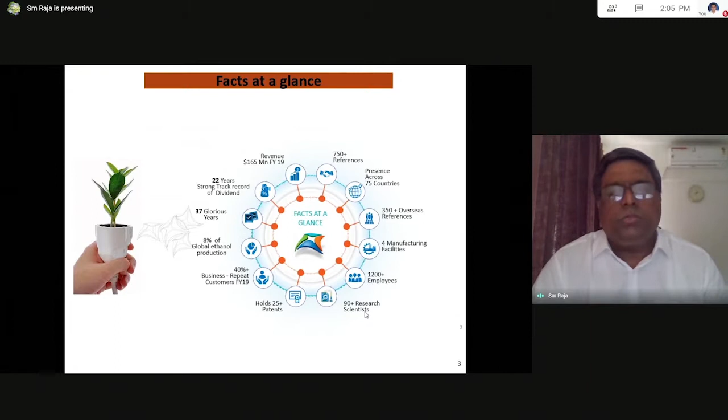So predominantly, Praj Industries is into bioenergy. Basically, we are the leaders in distilleries and breweries. And most of the distilleries and breweries in the country, like more than 70-75%, have been set up by Praj Industries. And we have 5 verticals, the main being bioenergy, which is categorized as 1G, that is bioethanol. And the other one is 2G, which is called the ethanol for blending with oil, that is basically your diesel or petrol, which is gaining more and more importance now with fossil fuel being exhausted.

The other division we have is high purity, where we produce very high purity water, especially for the pharma and cosmetic industries, where they require very sterile water for their formulations. And we also have a very big fabrication unit, wherein we do fabrication of very large equipments, and we supply it to many of these contractors like L&T and other big companies who are into engineering projects.

And one of the main verticals where I am associated is water and wastewater, where we give complete water treatment as well as wastewater treatment solutions as a turnkey contractor. We design, engineer, supply, erect and also commission the plant. We also do operation and maintenance of these plants. And we are one of the very few companies in India who can offer complete end-to-end solutions in water

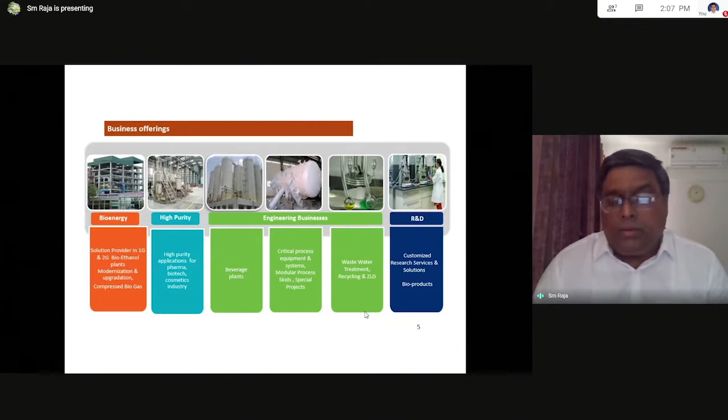We also have a very big basic R&D, which is called Matrix. It's a 100 crore investment. We do a lot of research. We have almost 100 scientists, all of them PhDs, and also a lot of postgraduates who are working on many of the solutions that we offer to our customers.

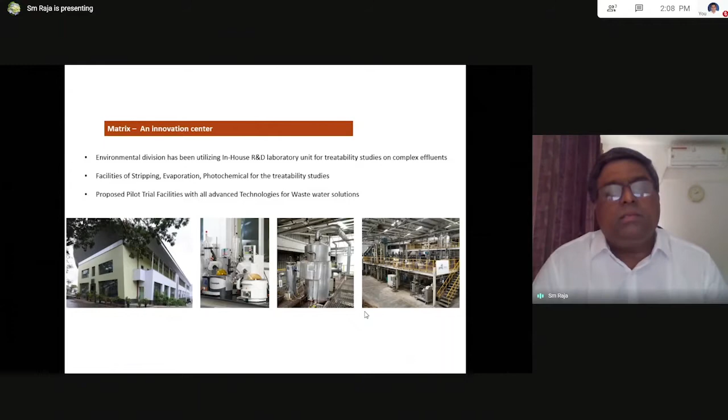And it includes the development of new products which are more environment friendly, and green chemicals. And we also have a facility where we can do piloting of the products that we are researching and giving to the chemical industries predominantly. So we have a very large facility where we do all the piloting, and then it is scaled up to field scale units.

Out of the fresh water, 69% resides in the glaciers as ice, 30% as underground, and less than 1% in lakes and rivers, which is the main source of water for all of us, not only human beings, but even the other living beings. So 1% of water on Earth's surface is usable by all the living beings on Earth, including 7.8 billion human beings as of today. It's going to increase more. And 99% of this is unusable.

So we can understand it's not an infinite source, it's a finite source. And therefore, for future sustenance, it is imminent that we need to reduce the consumption of water as much as possible. We need to conserve it. Not only that, we have to also reduce, recycle, and reuse as much water as possible.

The main uses of water available for human beings can basically be categorized as domestic and industrial use. In domestic use, most of the usage is for drinking, cooking, washing, gardening, and bathroom washing. Whereas in industrial use, you have boiler feed water, then you have demineralized water. And as I told you earlier, high purity, that is your pharma and food.

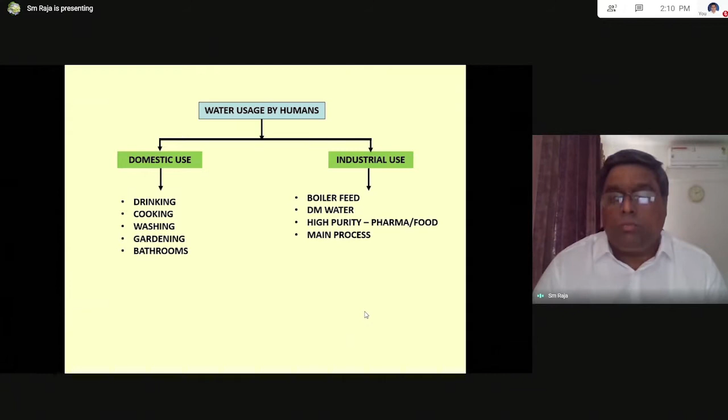It may seem very simple, but water is one of the trickiest chemistries. So there lies your chemistry in this. Water chemistry is very intriguing. It's very difficult to understand, though it looks very simple. So you have the main source of water, that is the source of drinking water, which are the streams, the lakes, rivers, and aquifers, which is your groundwater.

And then we are looking more and more to the oceans because the freshwater source is limited. So now we have more and more people putting up desalination plants where seawater is converted to drinking water. This is more predominant in the Middle East, where there is absolutely no source of fresh water. They have to depend on seawater, and the seawater is converted into drinking water.

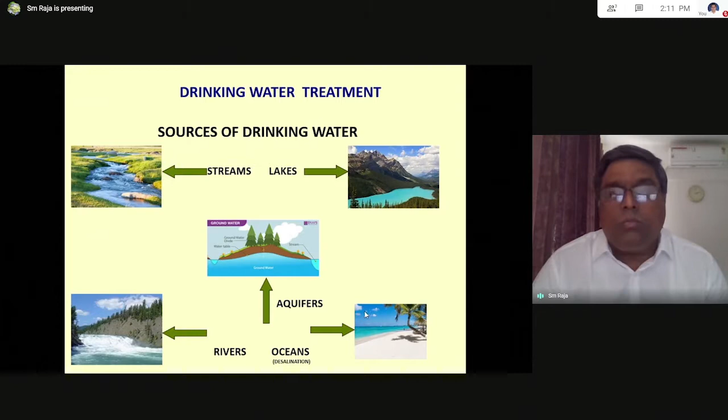Let's look at some of the natural contaminants in the drinking water sources that we have. If you look at surface water, that is the rivers and lakes, predominantly it contains suspended solids and colloidal matter. So most of the time you find that these resources are highly turbid, and you can see a lot of suspensions in this water. It also contains a lot of dissolved iron, because iron is one of the most common elements on the Earth's crust. And besides, some of the sources also have color and some sort of a mild taste.

And there are also sources with runoff, which is called agricultural runoff, like pesticides and other things, which also contaminate the surface water that is available. And of course, pathogens like bacteria, virus, and to a certain extent algae, depending on what the source is and where the source lies. As far as groundwater is concerned, predominantly it is all dissolved. You have very little suspended solids, because by the time it reaches the bottom of the aquifer, it is already filtered through the layers of sand and rocks.

And then by the time it comes down, the suspended solids are filtered naturally. However, it picks up a lot of the elements that are there, like the fluorides, arsenic, nitrates, iron, and a lot of dissolved salts. But if you see most of the cases, it is hardness. It is calcium and magnesium which causes hardness of the water.

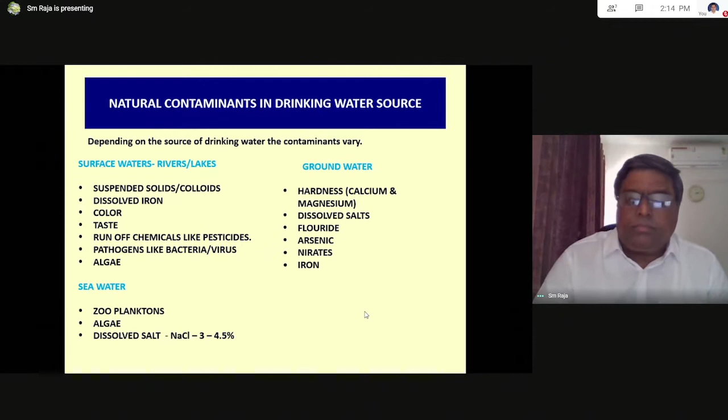The pH should be in the range of 6.5 to 8.5. And the taste also should be agreeable, in the sense that sometimes the water tastes very bad and we are not able to drink the water. The turbidity has to be less than 1 NTU, that is nephelometric unit. And dissolved solids, though what is desired is less than 200, which is normally what we call the soft water or sweet water, up to 500 you can still make it drinkable. The maximum limit is around 2000 milligrams per liter. So these are all milligrams per liter.

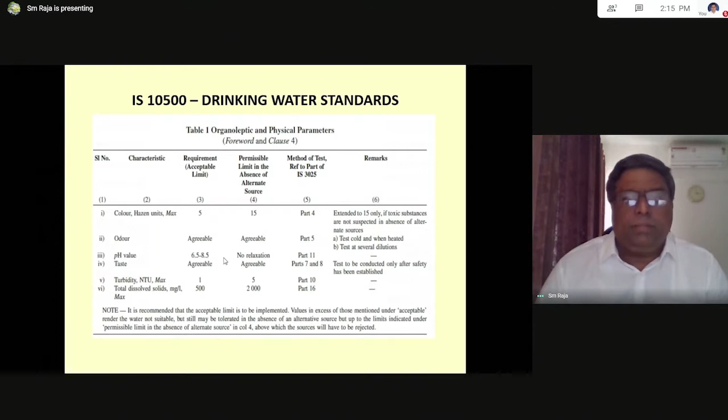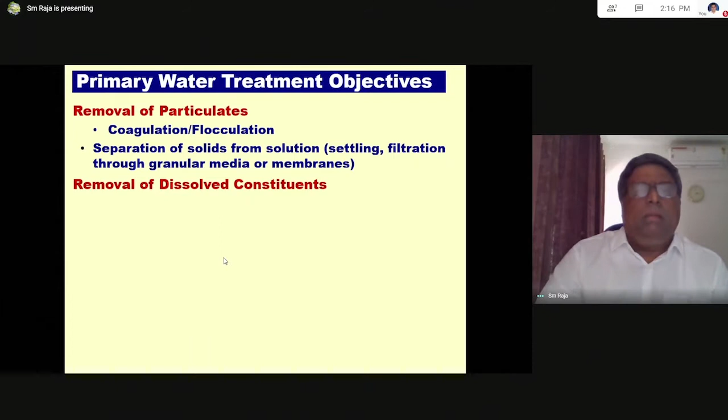So what are the primary objectives of water treatment for drinking? First and foremost thing that we need to attack is the particulate matter, which is the colloidal or the muddy constituent of the water. And to remove these particulates, we use a lot of chemistry for actually settling this matter. So if you naturally keep the water for some time in a container, the suspended solids gradually settle down. Then you get a fairly clear water at the top, which can be decanted and used for drinking. Still, it will have colloidal matter, which is not desirable to consume.

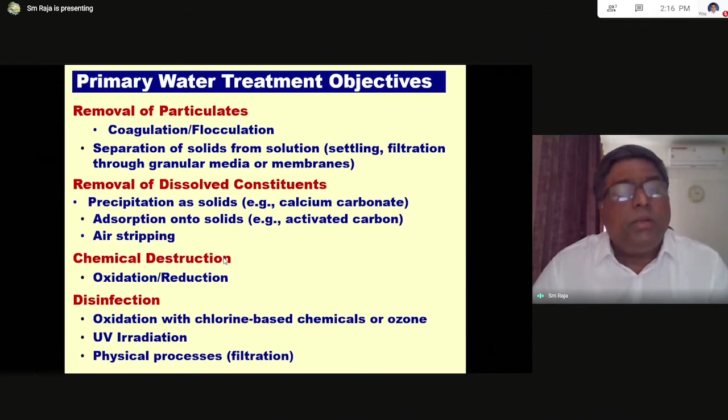Hence, there are different steps in the water treatment plant where you actually target different constituents, which I had mentioned earlier. So the first one, as I told you, is removal of particulates, where you add coagulants. Essentially, it is iron or aluminium-based coagulants. These are alum or ferric chloride. And these coagulants basically break the charges. All the colloids are normally negatively charged. When you add these metal coagulants, which are positively charged, they neutralize the charge on the colloids.

They don't otherwise settle because the density is very low. Coagulation helps in discharging these charges on the colloid matter, and they come together. Now, when they come together, they start forming larger particles and the density increases slowly. To aid this density increase, we add something called a flocculant.

So generally for drinking water, these are high purity flocculants, and because these are synthetic chemicals it is not desirable, but still sometimes flocculants are added. It's called a polyelectrolyte, and it increases the weight or the density of these particles and it settles very fast. So you have the first step of solid separation from the water, and that is your settling tanks.

And further, the colloidal matter which doesn't settle goes through a filtration unit, which we call a rapid gravity filter or sand filter. Essentially, sand is the media. And then it can also be taken through membranes. The latest technologies are when you provide these ultrafiltration membranes, where it can take off almost 99.9% of the colloidal matter. And what comes out, the permeate, is absolutely clear. And you can drink the water directly, of course, after disinfection.

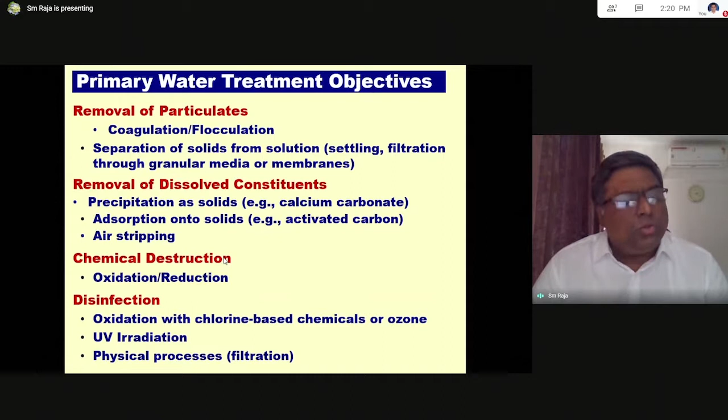And finally, the pathogens, that is bacteria and virus, which are also very important to remove. You need to disinfect it, and for disinfection, we use predominantly chlorination, because chlorine has a very long life as they form chloramines, and the presence of chloramines actually prevents reintroduction of the bacteria into the water. Most of the water after treatment is stored in large tanks or reservoirs, from where it is distributed to the population or the end use. Hence, it has to be ensured that there is no recontamination of bacteria, and that's why chlorine is predominantly used. However, we can still use UV radiation and also ozonation as the disinfection agent.

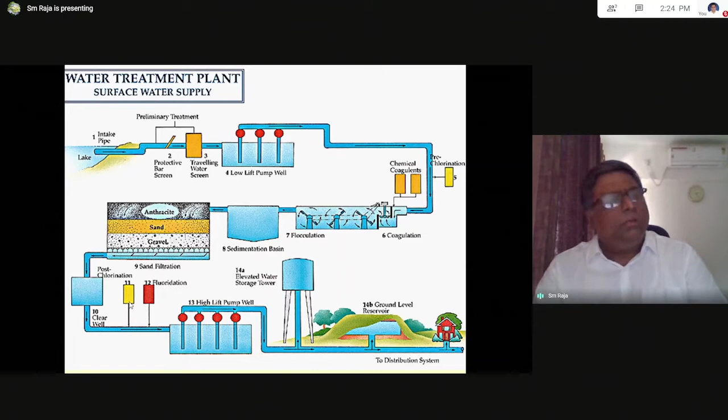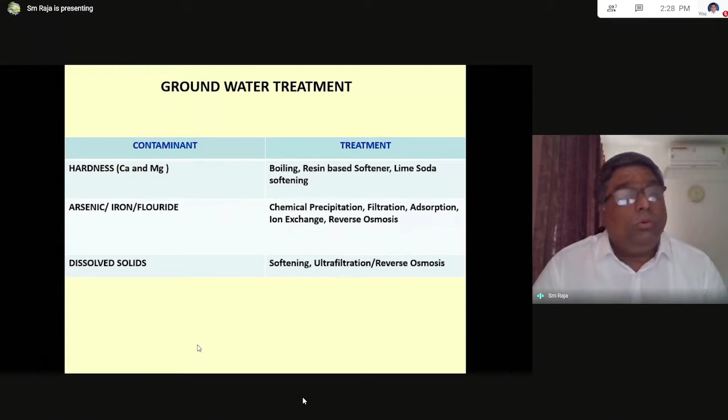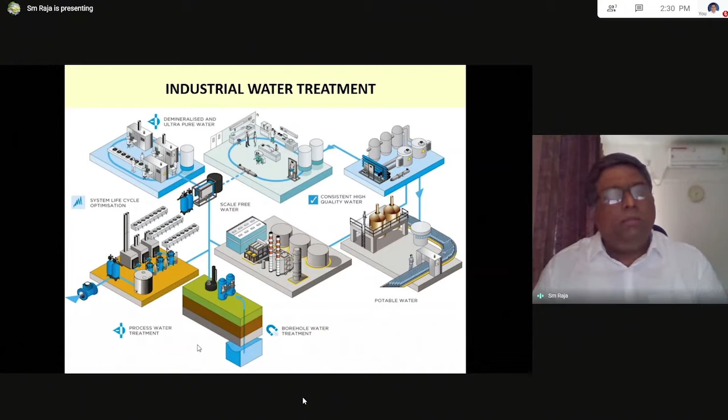So water treatment per se, depending on the end use, can be either a simple treatment like we do for drinking water application, or very complicated basically for industrial use. So the cost of water treatment is dependent on the final quality that you require of the treated water.

Now, more and more, as urbanization is increasing and the populations in cities are increasing, there is very little water available, and all these cities which are near the sea are looking at seawater as the main source of drinking water. This is predominantly true in most Middle East countries where there is absolutely no source of surface water available. And even if you've gone through the news a couple of weeks back, even in the USA, in California, they are water starved, and water has become a commodity for trading. So you can understand the future we are going into if you don't have a source of water.

Seawater is extremely expensive to treat because it has to go through all the sophisticated technologies like UF and RO, and at the end of it there is a byproduct which is highly concentrated and full of salt. How do you dispose the salt? That itself is a big problem, a big challenge. So things are not that easy. At the same time, if we are able to recycle and reuse most of the water, that is going to be our solution.

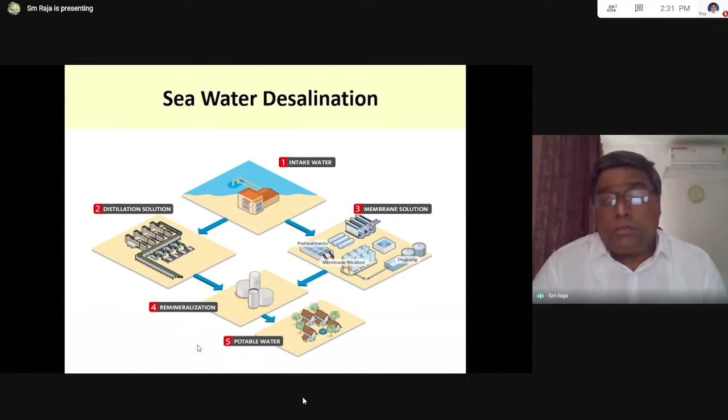As the water consumption reduces, it means all these countries are getting less and less water, either because the source is limited, or their water treatment facilities are limited, or they are in a water starved and water stressed area. India is one of the water stressed areas, and it has been said that in future India is going to go through a very difficult time satisfying the water needs of the majority of its population. So it is very important for us to understand how water has to be conserved and used as little as possible, so that we conserve this water for our future generations.

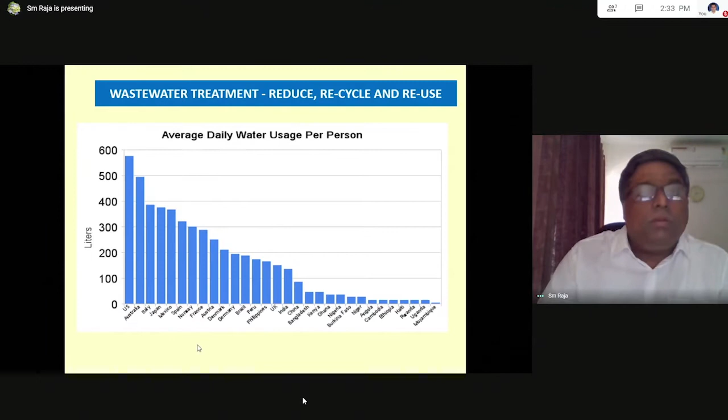So I will now come into wastewater treatment, which is very important. I think it's the most important subject for all of us to understand, because we are all equally responsible for the amount of waste generated in the country and all over the world. 80% of the drinking water we consume is converted to wastewater, and it predominantly comes from our bathrooms and toilets. The source in domestic wastewater is kitchen, washrooms, wash basins, and laundry.

So imagine you take 100 liters of water, only 20% is used for your normal consumption and cooking, and 80% is the wastewater that you generate. So if you calculate per capita generation, you can imagine what will be the amount of wastewater that is generated. It runs into millions and millions.

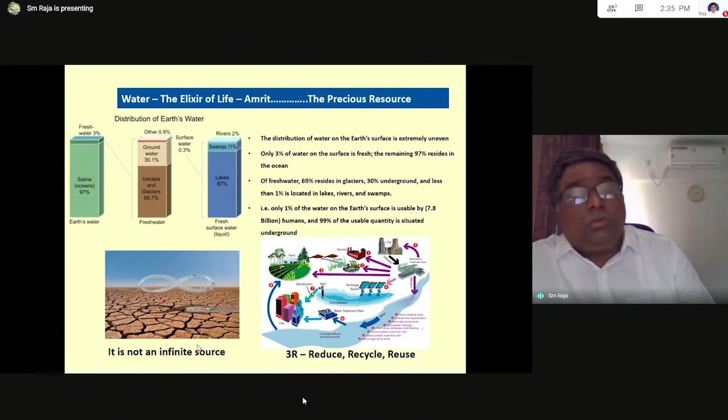So I would again come back to the first slide I showed you about the state of water, the availability of water, where I said it's not an infinite source, it is a finite source. And we need to really be very serious in conserving water at source and minimizing the wastewater. Even though you cannot eliminate wastewater, it is going to be there. But how do you manage the wastewater? It is best that we follow the principle of 3R, that is reduce, recycle, and reuse. There is no other option left.

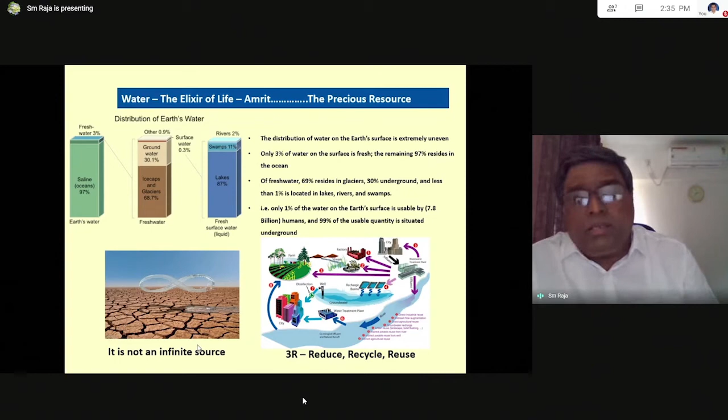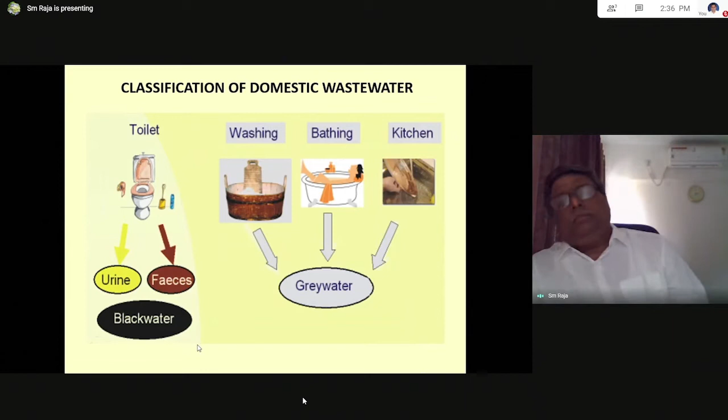And so we come to the topic of how to treat this wastewater, the domestic wastewater. I'm not going to touch on the industrial wastewater because it's a very vast subject, and the more the usage, the more complicated the wastewater becomes in terms of its components and constituents.

So if you classify domestic wastewater in terms of generation, there are two main classifications. One is called black water and the other is gray water. Black water is the urine and feces generated through usage of the toilets, whereas gray water is predominantly from washing, laundry, bathing and kitchen. You can segregate these two and recycle separately, or mix them together and treat as a single domestic wastewater. It all depends on the place and ultimately the treated water quality required for where you're going to use the treated wastewater.

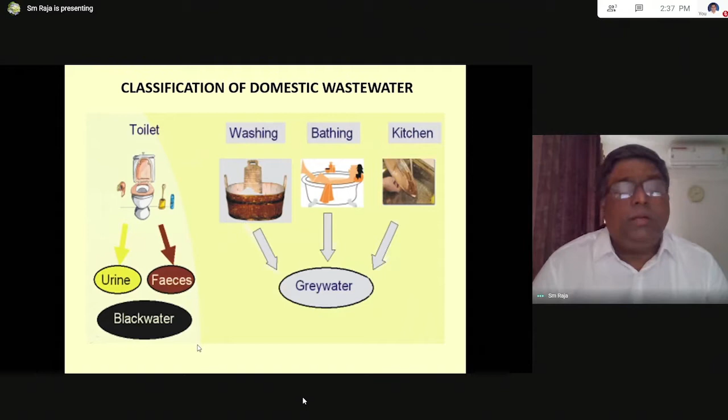Now, the typical composition of sewage, domestic wastewater: the contaminants are predominantly suspended solids, which we have seen is also part of drinking water treatment, but this suspended solids is different from what you've seen in drinking water. You also have dissolved organics, classified or termed as BOD and COD. BOD is biological oxygen demand, and COD is chemical oxygen demand. Both are essentially the same, only differing depending on the analysis and the constituent segregated.

So it's very difficult to individually know what the contaminant is, like I cannot keep analyzing each and every component in the wastewater. So best is you take a parameter that defines the amount of contaminant, the scale of contaminants. That's how the biological oxygen demand, or BOD, concept came about, where we know that when this water is left without treatment into any water body, either lakes or rivers, there is a biological oxygen demand needed to naturally degrade these organics. So that is called the biological oxygen demand, and there is an analysis which gives you how much the BOD is.

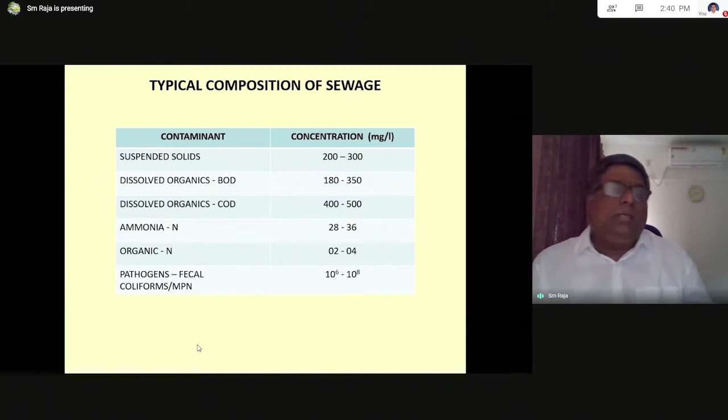And then we have ammonia, which is all your amino acids, your proteins, what you eat, your digestion. Byproducts of your digestion are predominantly nitrogen and phosphorus. So your sewage will contain ammonia nitrogen, organic nitrogen, and also phosphorus. And then the most important is your pathogens, your fecal coliforms, what we call the MPN. So these are all indicators of the level of contaminants in a domestic wastewater.

In a sewage treatment plant, depending on the constituents that you need to separate or treat, there is a flow sheet that has been developed, which is a very conventional flow sheet. Most of the sewage generated from households is collected through drain pipes. Earlier there used to be septic tanks, but septic tanks have also become a problem because the overflow from the septic tank ultimately goes into your groundwater and contaminates it.

So in large cities and municipal corporations, you have a sewerage connection system where the sewage from all these households is collected and conveyed through pipelines to centralized sewage treatment plant units, where all the contaminants of the sewage are treated stage-wise. The conveyance may be through a pipeline or an open drain, which is normally not there. Nowadays, open drains are not permitted. It is generally through underground pipes.

It contains a lot of floating matter because people just push everything into the toilet. And when it comes to the end of the pipe, where it enters the sewage treatment plant, you will find all sorts of things that are irresponsibly put by people into the toilets. They just flush it through the toilet. So it contains a lot of floating matter which needs to be removed.

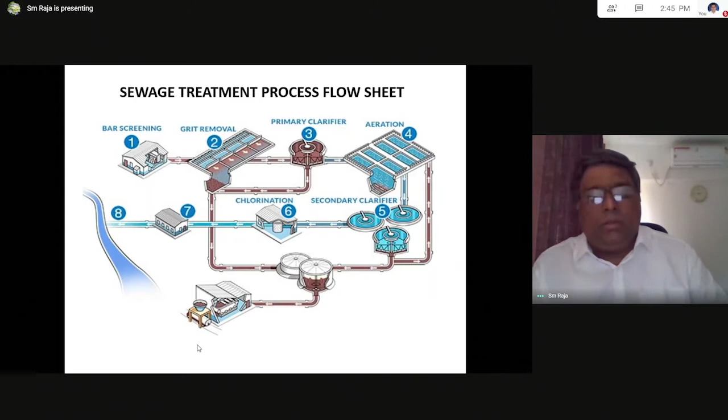But if you don't remove the nutrients, the nitrogen and phosphorus, it is going to cause eutrophication of all the water bodies where this treated sewage is ultimately going. So the fundamental principle is that after treatment in a sewage treatment plant, all this treated water will get diluted further in the receiving water body, like a river or a lake or any other water body where there is some source of fresh water also coming in.

So as I told you, I'll just run through the flow sheet. This is pre-treatment, and you can see there is a screen, a mechanical screen, which continuously removes the floating matter from the sewage, and the floating matter is separated from the water. And then it comes into a grit chamber. So the grit chamber is basically, again, a sedimentation tank. And in the sedimentation tank, the grit is removed at the bottom.

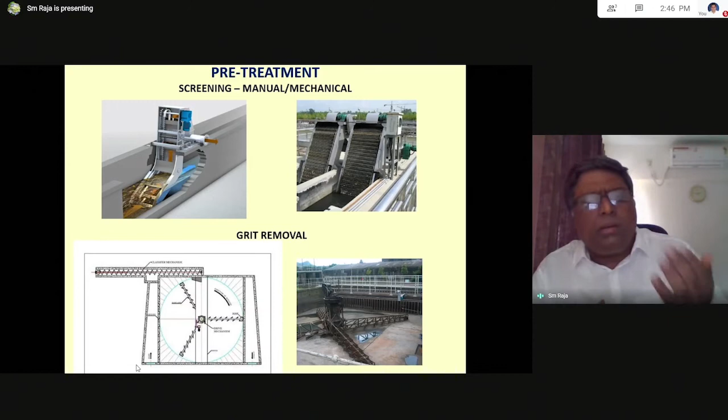There is a scraper. The grit is scraped at the bottom and taken to a central point, from where it is again separated from the organic material, because the sand also contains a lot of organic material. So you have a rake classifier which separates the actual sand from the organic matter. The organic matter is returned back into the sewage treatment plant.

And after the separation of grit and screenings, it goes into primary treatment, the primary clarifier. It's essentially, again, a civil tank, an RCC tank that is constructed in a circular configuration. It could be a rectangular configuration, but circular is easier because you have what we call the rake mechanism. It's mechanical equipment with a motor and a gearbox, and it rotates at the bottom very slowly, because whatever settled sludge is there has to be taken into a central well, from where there is a pipe for discharge of the sludge.

So this sludge from a primary clarifier is very rich in organic matter. It is full of calories. So it goes to a sludge digester where it is anaerobically digested downstream, and you can generate biogas from the sludge in the anaerobic digester.

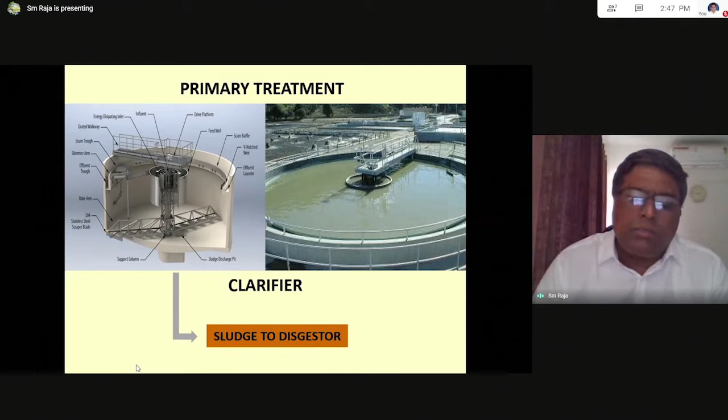So once your suspended solids are predominantly taken out of the water, the next step is to remove the organics, that is the BOD and COD. And as I told you, there's a typical aeration tank. These are again all RCC tanks, which contain the domestic wastewater. And you have the aeration system where you have a blower along with fine bubble diffusers. The fine bubble diffusers are given because you need efficiency of the blower to reduce the power consumption.

And just to give an idea, in any sewage treatment plant, the maximum cost of treatment goes to oxygenation, that is the air blower. You have to have massive air blowers to supply the amount of air that is required for the bacteria to oxidize the BOD and COD organic materials and reduce the BOD and COD in the treated water outlet. And hence almost 60% of the energy used in the sewage treatment plant goes only to providing air for the aeration system.

So once the microorganisms in the aeration tank perform the duty of removing the dissolved organics, it is taken further into a settling tank where the sludge is settled and the clear water comes out of the clarifier. It is more or less very clear except for some particulate matter again. And if you compare drinking water and wastewater treatment, the settling tank units remain almost the same, and the downstream filters also remain the same. But here we are actually separating the biomass, not the inorganic particulate matter, unlike in the drinking water system.

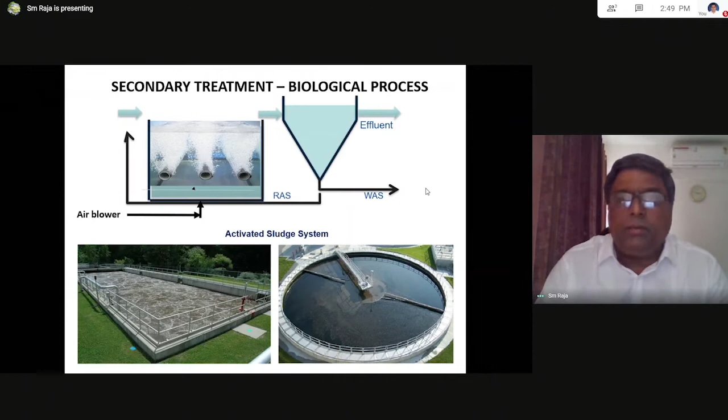But what happens in that due course is it goes through a series of biochemical reactions, and finally you have methane as the gas, the biogas, which is predominantly methane, carbon dioxide, and H2S to a certain degree. But essentially it is all methane, which can be used. So the effluent gas is collected at the top because the gas will go up, and the gas can be taken into a gas holder from where it can be reused: either you can use it for cooking, or the gas can be used to generate electricity through a dual fuel engine.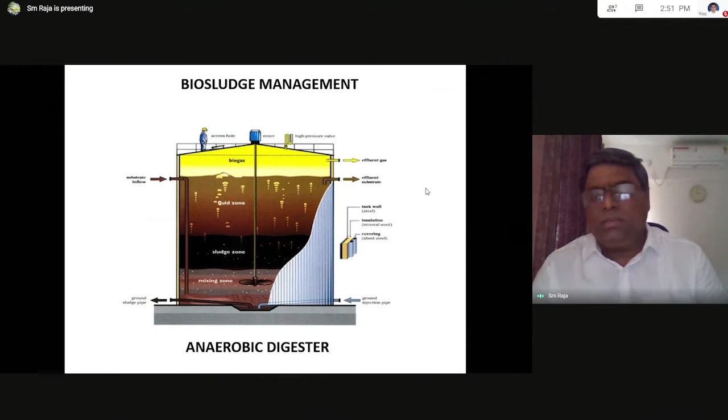So a lot of plants today are going in for biogas recovery from the waste, because ultimately every wastewater treatment is full of energy. It is full of energy, and there is a lot of organics present in the wastewater. And what happens to the digested sludge? The digested sludge is further dewatered. All the water component is removed, and you see to it that you have maximum solids into it so that the volume of the waste reduces. So there's a cost attached to transportation of the sludge also.

Then it is given hydrothermal treatment, wherein you can convert the sludge, the biosludge, into solid fuel, which can be used back in industries like biorefinery. It can go into a lot of other uses like electricity generation or source of heat. And also it can be used as natural fertilizer. A lot of this digested sludge is taken by local farmers and used as a fertilizer for their fields.

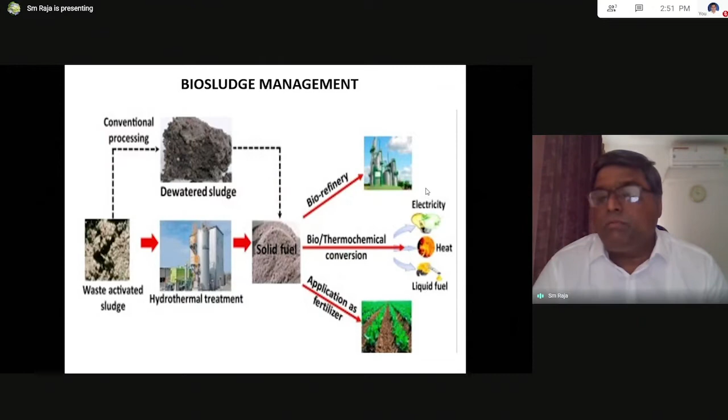Now, the treatment doesn't end there after the biological system, because if you have to reuse the water, most of the treated sewage is used back in gardening. It can be used for toilet flushing. It can be used for car washing. It can be used as cooling tower makeup by the industries. So there are various uses of this treated water. Instead of using fresh water, you can as well use the sewage that is treated and reuse it in these non-potable applications. And this is what is done predominantly all over the world today, because most of the sewage that is generated, they are trying to reuse as much as possible.

So for getting the quality of that water, where the reuse quality needs to be better than the secondary treated water, you go for a tertiary treatment. Again, the tertiary treatment is predominantly filtration. You have sand filters. Then post-filtration, you can chlorinate. You can even chlorinate before it goes into the filters. And then you can use ozone, or you can use UV also as a disinfectant, where your treated water becomes completely pathogen-free. And even if somebody touches it by mistake, it is free from any hazards. Otherwise, if it's untreated, it is a hazard for the health.

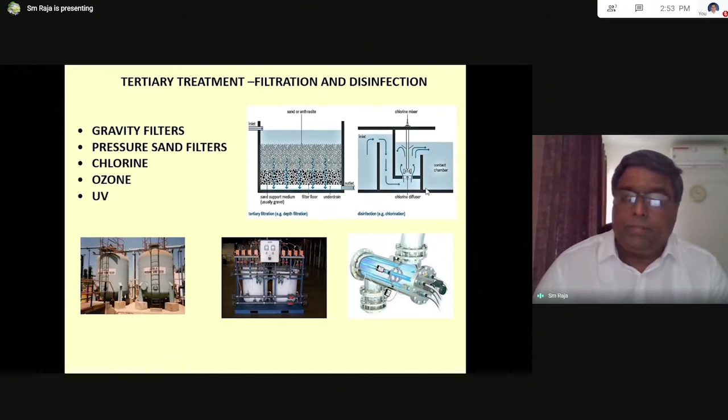So similarly, like drinking water, there are Indian standards which have been formed by the Central Pollution Control Board for treated sewage, and for treated water from industries there are different standards. But treated sewage has to meet certain standards based on the point of discharge. If it is inland surface water, the concentrations of the components like oil and grease, particulate matter, ammonia, nitrogen, etc. are different. If it is public sewers, which means it goes downstream for further treatment, then it is different.

You can use it for land irrigation. So for land irrigation, the treated water quality is slightly more relaxed, because ultimately it is used up by the soil and the plant. And then for coastal disposal, again, there is a different standard. So the standards have been very well laid by the Pollution Control Board, depending on the point of discharge of the treated water.

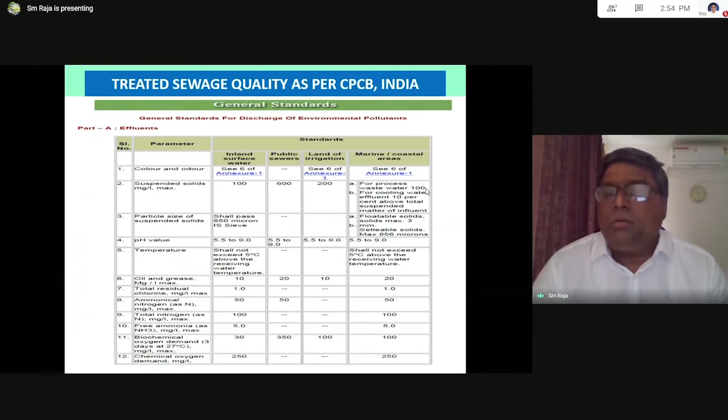So can we treat this water to drinking water standards? That's a big question that everybody has in their mind. Yes, we can treat the sewage, the domestic sewage, to a purer form of drinking water, which will be much purer than what you're currently getting from your source, either groundwater or even your freshwater source. And this is being done in Singapore, where the sewage is treated into drinking water. It is bottled, and it is also given to people who visit their plant.

But the only problem is there's a psychological limit. There's a psychological barrier where people do not want to drink. But I can tell you this is purer than most of the drinking water that we receive in our houses. And so they are encouraging people to reuse the sewage back into drinking water. It's absolutely safe, absolutely odorless, tasteless, and very, very pure. So maybe this may be the future. As I told you, water has already started getting traded.

Some of the hard facts that we need to know about wastewater treatment plants are that they are highly capex intensive. There's a lot of capex in providing all this equipment. It is not cheap. It is very expensive. The operation cost is also very high, because as I told you, 60% of the operating cost is only for the biological system, the air blower itself. Then you have the power requirement for the pumping and all other equipment, your agitators, etc. So it's highly OPEX intensive.

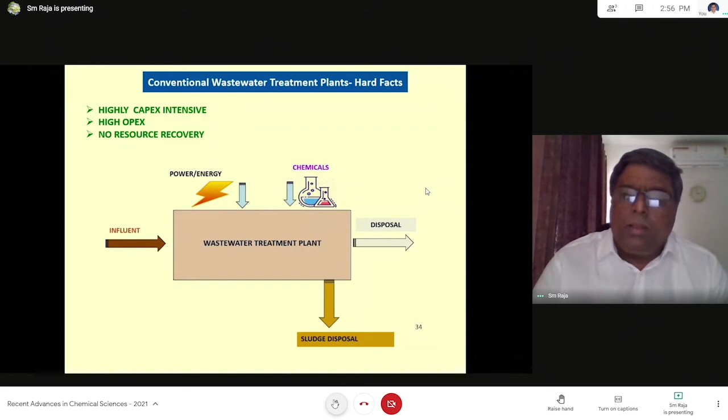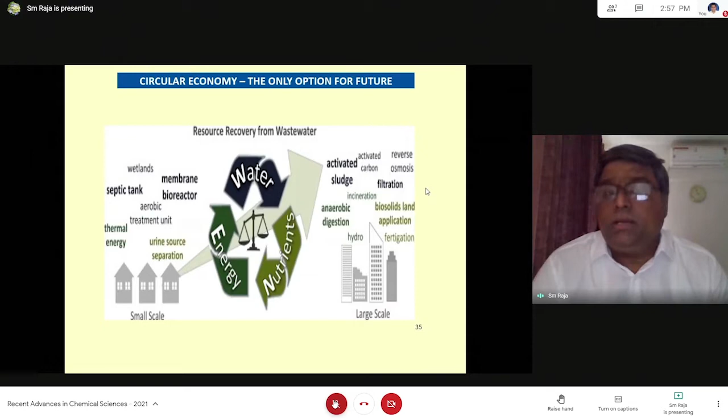So what is the future? The future has to be a circular economy, the only option that we have for sustenance. We need to recirculate the water. We need to recycle the water. We need to recycle the nutrients that are present in wastewater. We also need to reuse the energy. That means we need to generate energy from wastewater rather than using energy to treat the wastewater. So there's a lot of paradigm shift in the thought process. There's a lot of work going on, and in the next 5 to 10 years, you will find that most of the sewage treatment plants will become a source of energy generation rather than an energy sink. So we are going towards that end.

So some of the recent advances, as I told you, a paradigm shift, is use less chemicals, generate electricity, and generate byproducts in the form of bioplastics and fertilizers from the sludge. And you can go for zero liquid discharge, where not a drop of water goes out of the premises. It is 100% recirculated and recycled back to non-potable or potable use if people are okay to drink it, and also evaporate the small volume of waste that is generated, because all these recycle plants will require a reverse osmosis plant where there is a portion called rejects, which is basically concentrating all the salts and converting most of the water into very high purity water through the membranes.

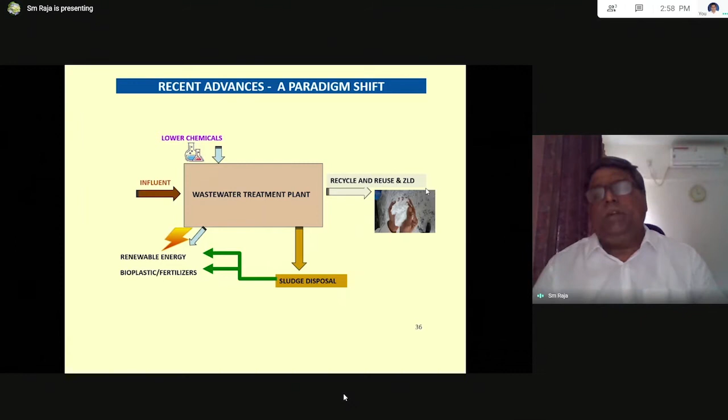But the reject has to be managed. For the reject to be managed, it has to go through an evaporator where you evaporate this small quantity of water. The byproduct of the evaporator is salt. So all your salts, predominantly sodium chloride, will again be recovered back from this wastewater treatment plant. So the entire focus has now shifted to make the wastewater treatment plant not a place where all the resources are being used, but to generate resources and preserve all our valuable resources that are already there.

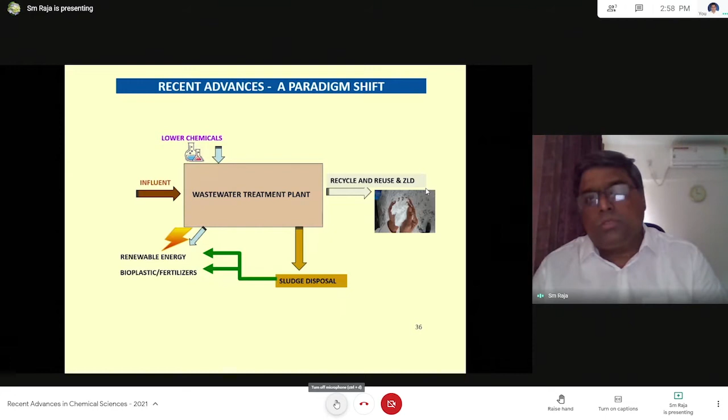Sairam sir, we have five minutes to conclude, sir.

So what are the drivers of the paradigm shift? One is reduce at source by segregated treatment, which also reduces the cost of treatment and the complexity of treatment. Reduction in energy consumption. Basically, as I told you, 60% of the energy is used for aeration. So you have new technologies coming in, wherein you have an anaerobic and aerobic combination. Anaerobic doesn't require much energy. In fact, it generates energy. So a lot of thrust is being given to use anaerobic and aerobic as a combination and reduce the net energy consumption, and in fact to generate energy.

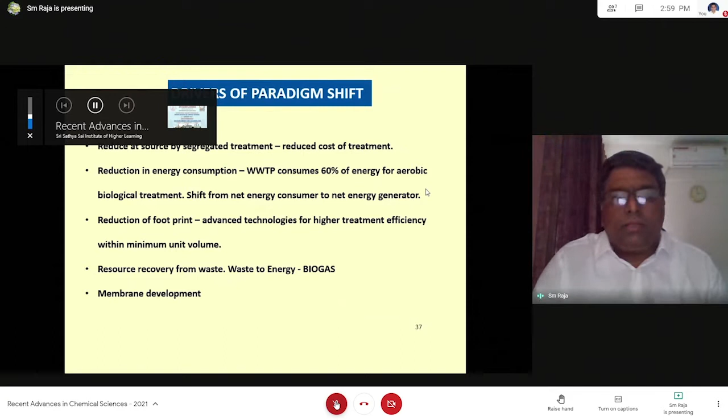So if you see the reduction, so also reduction of footprint and resource recovery from waste. So these are some of the latest developments that are going on.

So just to give you an idea, the organic component is almost 14.7 kilojoules per kg COD of energy. And then you have so much of energy, power that can be generated. You can generate as high as 140 gigawatts of power from the wastewater treatment plant. And this is going to be a reality in the future, in the next 10-15 years.

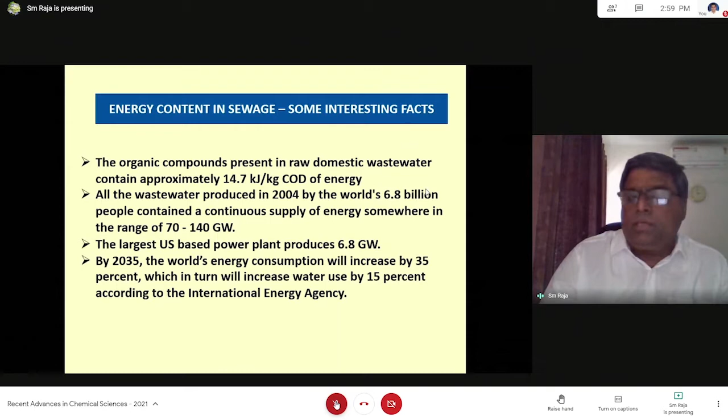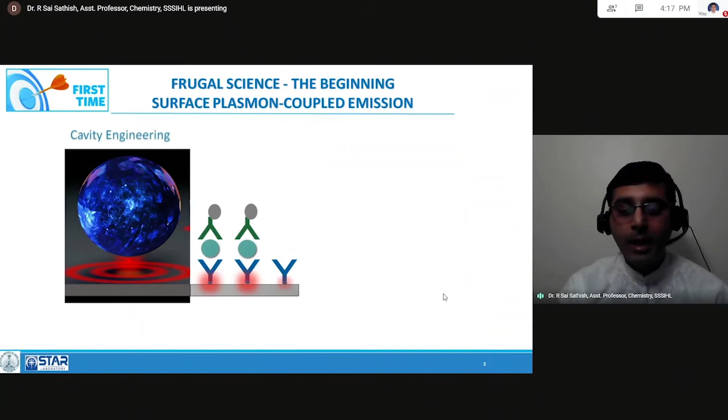So our overarching vision is Sarve Jana Sukhino Bhavantu. It is working towards holistic health management using medical diagnostics as a means to that end. Over the next few minutes, I will be sharing with you the innovations that have come from the Star Lab. To start off with, it's all about what we look at this point in time as frugal science, and that has its beginnings way back 7 to 8 years ago. So the story will start 7 to 8 years ago, what happened, and finally how it came to what it is in the last 3 years and where we are now.

Starting off, we know that if we are talking about fluorescence emission, this requires a fluorimeter, a spectrophotometer that costs around 50 to 55 lakhs Indian rupees. Here we shine light onto a molecule, the molecule emits, and then we study the behavior of that molecule using the fluorescence emission coming off it. So we began to ask the question, how can we do this through frugal means? What if we just picked up a laser pointer that's used in classrooms, or even a low-cost LED light source that is available, and use just a prism?

And of course, we need a plasmonic substrate. There's a catch there, but we are working towards frugal plasmonic substrates as of now. Then you just have your cell phone to capture this emission coming off the molecule. That's what makes this platform called surface plasmon coupled emission. You just need a light source - it could be your laser pointer or a low-cost LED - and a prism that has this plasmonic substrate. You put this together and use your cell phone to capture this. We started getting good emission enhancements. The plasmonic substrate we use is, of course, a thin silver film on glass.

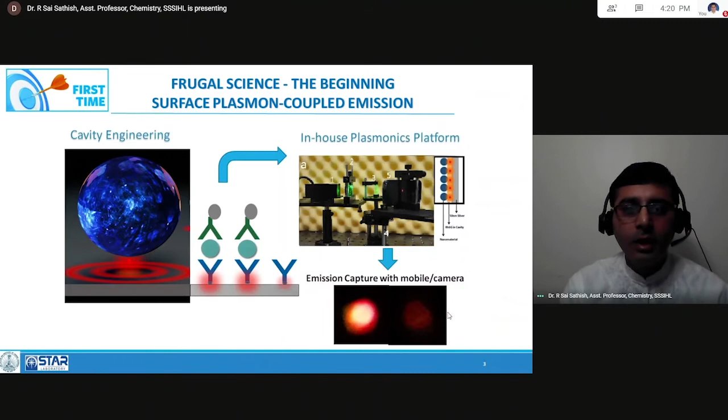So what we began to do is ask, can we play along with the plasmonic substrate to enhance this emission? Can we bump up this emission where conventional fluorescence captures maybe a few photons? With the surface plasmon coupled emission platform, if we had 10 photons captured, we could make it 100. And then we asked, what if we can make this 100 into something like 1,000 or 10,000? That's the kind of emission enhancement in fluorescence we got interested in, because we are trying to find a needle in a haystack.

I will tell you how that is happening. So we started making simple silver nanoparticles. We thought, how can we reduce the time in making these kinds of substrates? We used a bunch of low dimensional carbon materials like graphene, carbon nanotubes, carbon dots, then palladium nanoparticles, coated composites. We started taking composites together and playing along with this.

And then we found that when we used silver decorated carbon dots, we started getting 1,000-fold enhancements. This resulted in a bunch of publications. We could start showing that using the same frugal science, the very same laser pointer, a prism, a low-cost plasmonic substrate engineered in the lab, and a cell phone, is good enough to get this kind of emission enhancement.

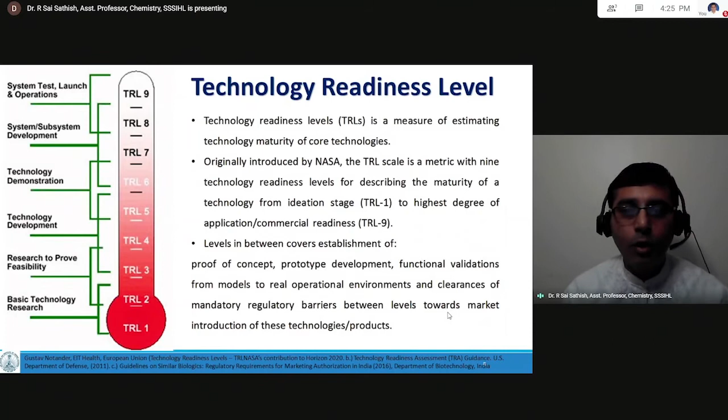So we have medical diagnostics coming from the STAR lab of the Sri Sathya Sai Institute of Higher Learning. We have made different novel nano-hybrid nanomaterials for medical diagnostic platforms. We have used them for both point of care and tabletop diagnostics.

In the point of care, we have worked towards perinatal depression. There was an earlier question asked about mental health, so I'll speak a bit of that. Definitely mental health is of concern. We know that the body is the gross form of the mind and the mind is the subtle form of the body. So yes, mental health is of great concern, more so today because the pandemic has seen a 32% increase in anxiety, stress, and depression after its onset.

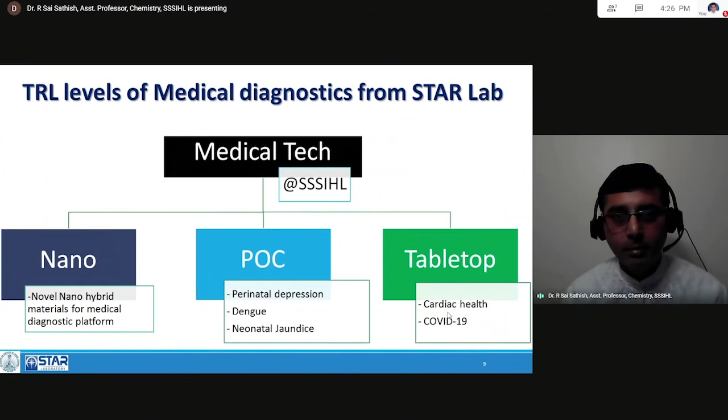So we have point of care diagnostics working towards perinatal depression, dengue, neonatal jaundice, and on the benchtop side for cardiac health and for monitoring COVID-19.

Starting off with perinatal care, this is something that has always been dear to Swami. The mother and child care has always been very close to Swami's heart, and that is where we were interested in perinatal care. Perinatal meaning we are looking at prenatal, during pregnancy, and postnatal, after delivery, of both the mother and the child. So we were working towards having handheld diagnostic devices for monitoring perinatal depression.

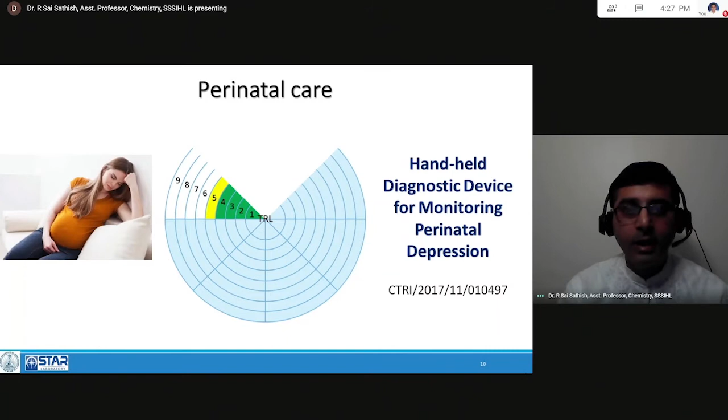We first wanted to understand the clinical and psychosocial characteristics associated with perinatal depression, and we were interested in the South Indian population. So we were looking at the perinatal care happening in our hospital in Brindavan, the Satyasai General Hospital, part of the Satyasai Super Specialty Hospital, and the General Hospital in Puttaparthi. We went about understanding what are the parameters in a rural and urban setting.

This involved a collaborative effort of 11 departments from 7 different institutions who came together, and we saw that there is definitely a high incidence of perinatal depression. There's 24% incidence that is happening.

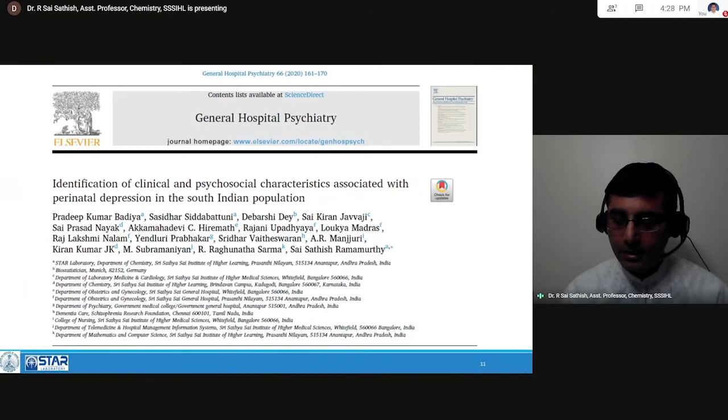And what we are seeing is the incidence is greater in the urban setting than in the rural setting for several reasons. Once we got to know that this is existing and growing in our society, growing in India today, as a lot of East aping the West practices happen, we see a greater incidence of this. That is where we thought, how can we serve or look into this pain point? How can we address this?

So as a pregnant woman in her first or second trimester walks up to the doctor, what are the ways and means the doctor can use to assess the person's mental health, even as they monitor several other body parameters and whatever biochemical parameters.

So we had looked at the longitudinal psychosocial health information, where we collected the Edinburgh postnatal depression scale parameters. We looked at the case report forms where around 80 to 100 different parameters were collected. We had their audio and video consent, of course, collected prior to the start of this.

And we have looked at greater than 1,700 data points collected from over 350 perinatal women who were enrolled for the study across 5 visits, 2 in the prenatal, during pregnancy, and 3 postnatal, after the delivery. We looked at the biomarkers, that is cortisol, estradiol, FT4, TSH. All of these parameters were looked at during the course of the study.

And the main thing we were seeing is what is truly our strength. We are a university that no doubt has both a rural and an urban presence.

So we have a real, in one sense, understanding of what is resource limited settings, because we look at the villages around and see what is the kind of plight that they are going through. So we were trying to answer, how can we come up with those diagnostics that are amenable to low cost, resource limited settings? So one of the things is it should be low cost, it should be near real time, and it should be amenable to resource limited settings.

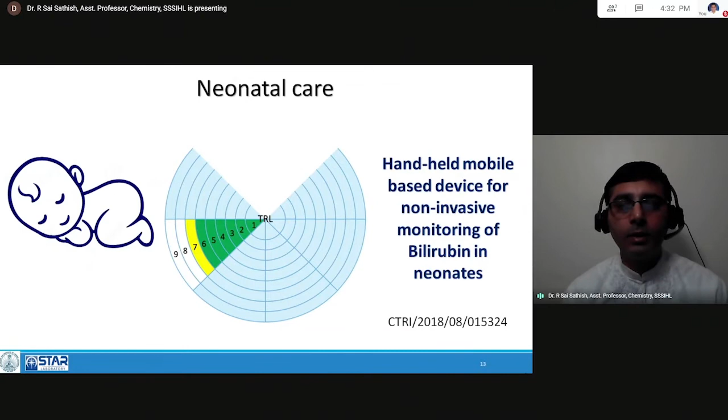So the next aspect of the study is about the neonatal care. Like I mentioned, mother and child care has always been very dear to us, Bhagwan. And so we have also been working towards a handheld mobile-based device for non-invasive monitoring of bilirubin. This is another pain point. So what we found is that generally for neonates who are born, there is an accumulation of bilirubin. The hemoglobin is breaking down to bilirubin.

And if this bilirubin that is broken down is not pushed out of the system, it tends to accumulate under the skin. And over time, when the concentrations go beyond a permissible limit, they lead to ototoxicity, neurotoxicity, and it becomes fatal for the neonate. And more so for the dark-skinned babies, this becomes difficult, because usually when you have light-skinned babies, you can make out the yellowness of the skin immediately. The baby can be taken and put under.

You have a blue light setting where, because of the photobleaching of bilirubin, all you need to do is, once you identify the baby is having hyperbilirubinemia or neonatal jaundice, you just need to take the child, place them under blue light phototherapy, as it's called, and ensure that it's bleached. It's a very simple thing of taking the baby and keeping it in a phototherapy setting. But to arrive at the decision becomes crucial, and more so for dark-skinned babies.

And usually what is done in this case is they do a heel prick method. They look at the heel of the baby. I've seen this on plenty of occasions, and it's very painful because there's the tender skin of the baby, and you'll have to take a lancet, prick the heel of the baby, collect the blood in the capillary, put it into, again, a spectrophotometer that tells you the amount of bilirubin present, and then you take the decision of whether phototherapy is needed or not.

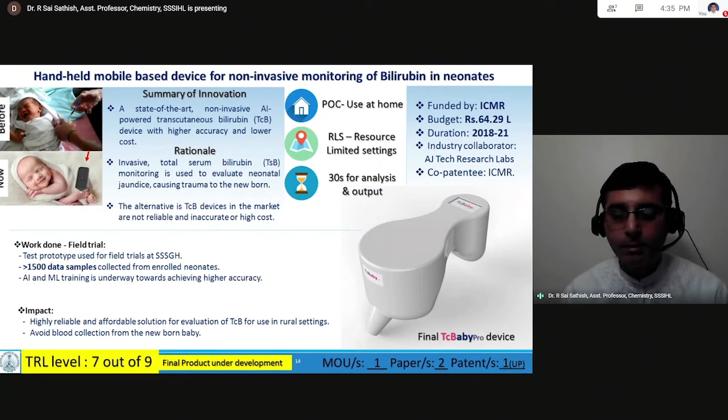And this is at a TRL level of 7 out of 9. We have certain MOUs signed in this. We have some papers and some patents that are upcoming in this regard. Going over to another platform that we are developing, it's for catering to dengue, and as we know, it's a communicable disease. So we are looking at a mobile dengue diagnostic technology, once again smartphone based technology, and this is at a TRL level of 4. We are ramping up the efforts in that regard.

And once again, the pain point we are trying to look at is when we have densely populated areas in India, the coming of the rain somewhere in the June, July months means we have mosquito breeding going on. And once that starts, it is just a question of time before dengue sets in. And in the pandemic condition that we are currently in, this becomes all the more severe because you have co-infections, you have reinfections of dengue, and when secondary dengue comes in, it can be truly fatal or severe, because you go through the febrile, critical, and recovery phases, the 3 phases involved in dengue.

The critical phase of dengue is very critical because that decides whether you go into the recovery or defervescence phase, or it becomes fatal. And there are certain biomarkers that we can monitor in this regard, and we are looking at the NS1 viral antigen, the IgG, IgM, and some of the cytokines.

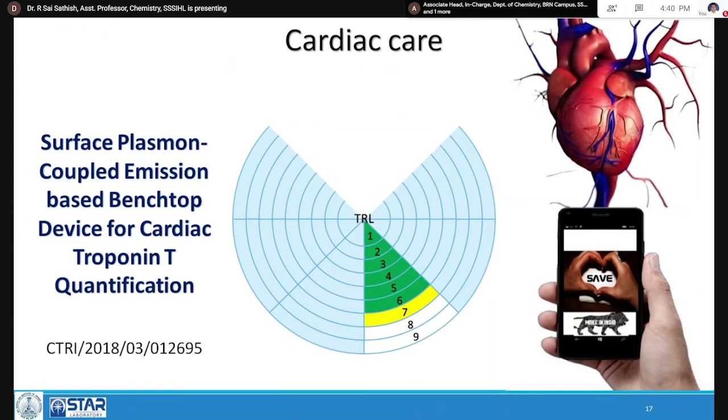So can we make this reach a primary health center that is out there in the village, that can have this device and monitor the health? That's the kind of question that we were asking. And to this, we have a benchtop test prototype that we have developed.

And if you see the device that we have developed in comparison with the current technology out there that uses electrochemiluminescence, the cost of the instrument is 40 lakhs, it needs a mini tempo for transport, but more than that, it needs a proper infrastructure to house such a costly equipment that is commercially out there, and it takes 45 minutes and high power consumption.

Compared to all of this, if you see our device, you will clearly see that with our surface plasmon coupled emission based platform, the cost is low. It can be transported in a suitcase, so we can take that and have it in a primary healthcare setting. It's close to 20 minutes sample to report time, and it's a standard desktop that can just run on UPS. So any resource limited setting, once again, can use this kind of a platform to start measuring cardiac troponin T and assess cardiac health as such.

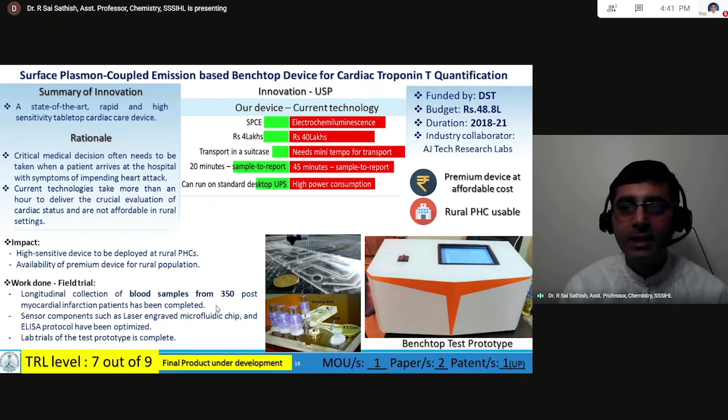In this case also, we have done a longitudinal collection of blood samples from 350 post myocardial infarction patients, and we have looked at their values right at the time of their admission and post the myocardial infarction event, how they are progressing. Those are the things that we have been following up on. And the device that we have has a TRL level of 7 out of 9, and the final product is under development. This was funded by the Department of Science and Technology, and we had industrial partnerships in this case too.

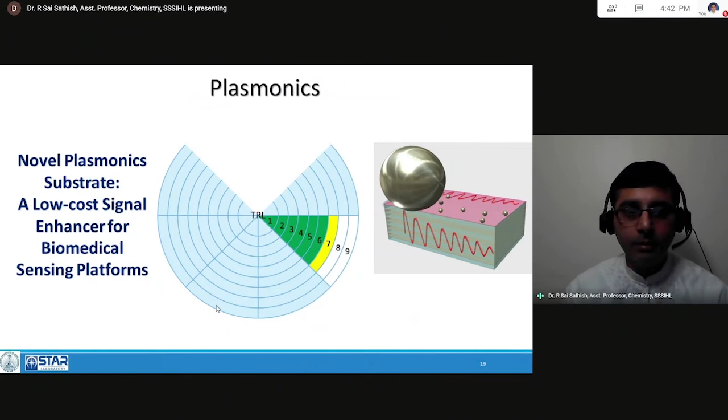And all of this was achieved because we could develop plasmonic substrates that are truly novel. One of the substrates that we have recently developed can be used as a low-cost signal enhancer for biomedical sensing platforms. And the uniqueness about this nano hybrid is that you can have it ready at room temperature, it's sunlight mediated synthesis, and all of this can be done in 1 minute. And we have filed a provisional patent for this nano hybrid material, because it's an eco-friendly method of synthesis, with tremendous translational applications in a bunch of arenas.

We have looked at the antibacterial, antifungal. We are now working towards even antiviral, looking at how we can take it forward for a COVID kind of scenario. So these are entities that form the core of our smart chip, and the material testing for several other properties is underway, and the TRL level of this nano composite that we have is 7 out of 9.

And coming to the most important thing that's been gratifying to work upon, with the support of our Vice Chancellor, sir, and our administration, is this COVID care. If you were to ask this question 7 to 8 months ago, whether we would have been working on this, at that point in time we were just thinking, is there a possibility? But it was the full support that our Vice Chancellor, sir, offered to get this project up and rolling that we have this at the stage it is today. So I thank the administration for the support that's been given at every point of all the projects, and more so this project on COVID care, which is on dual rapid test kits.

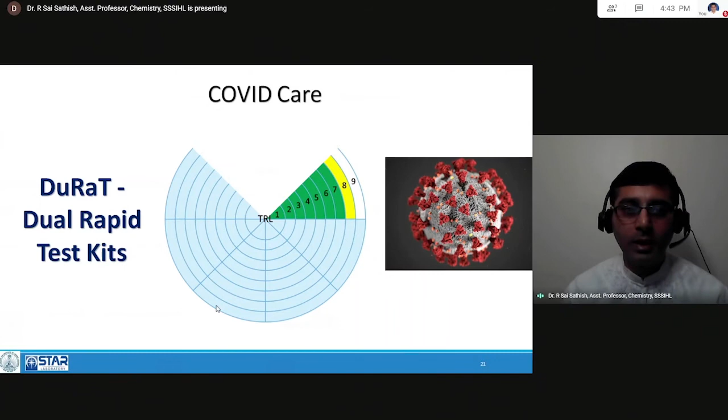So what we have here is we look at the gold standard, which is real-time PCR, and that is of course the perfect thing. You get reliable results. There are no false positives, false negatives; high sensitivity, high specificity, all that is there. But are they amenable to resource limited settings? What is the kind of cost? Yes, these days we are seeing the cost coming down significantly, but once again you need the sample to go from a primary health center to a central facility. What's the kind of load that we are having at that facility?

All those questions come into place, and that is where we are trying to say, can we make this truly point of care? Can we have this as a bedside tool for a patient, for a person who develops symptoms of being infected with COVID-19?

So we do have the rapid kits, but the rapid kits that are conventionally out there have their false positives, false negatives coming in. So you have 70% kind of sensitivity, specificity. So our thing was, how can we make that into something like 90 to 95% sensitivity, specificity, or even greater, to ensure that we get results as close or as good as an RT-PCR.

And towards this, we have partnered with companies to develop antigen detection strips. We have signed MOUs with them and worked actively with them to develop both antigen and antibody detection strips for indigenous detection of this COVID-19. So these rapid kits, as was mentioned earlier, can detect COVID-19 antigen and the antibody in less than 10 minutes. They require low reagent usage.

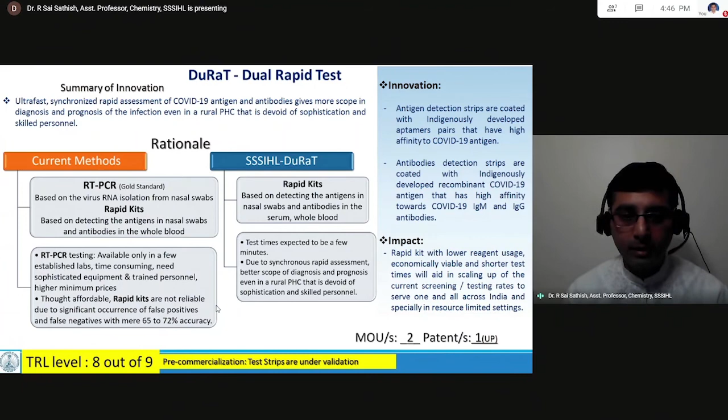And these are currently in pre-commercialization stage. The test strips are under validation currently, and we have a TRL of 8 out of 9 for this technology. The innovation has kits that are housed in two separate plastic cassettes. These are lateral flow assay based, and they have the immunoassays which show, in the case of a viral antigen, what kind of result you have, whether it's positive or negative, and likewise for the antibodies as well, using these lines.

We'll be clearly able to say whether the person is recently infected, the recovery is in progress, he has recovered, or they are in a stage of a long recovery, because these days we also see these long COVID symptoms come up. So these are the innovations that we have from the Star Lab at different stages of the TRL, whether it is perinatal care, neonatal care, the dengue diagnostics, cardiac care, the plasmonic substrates that we have developed, and the dual rapid antigen and antibody COVID-19 test kits.